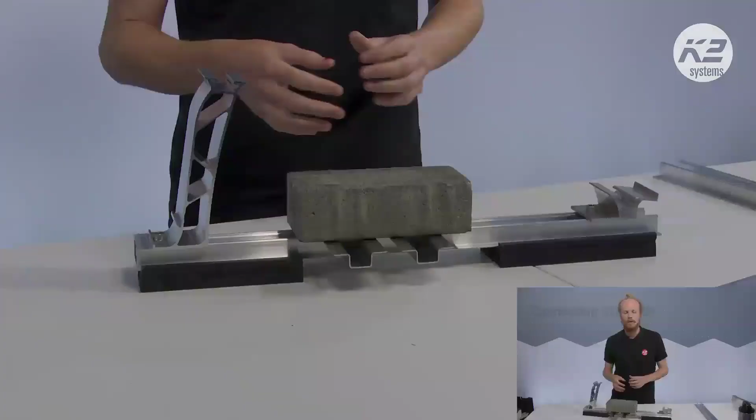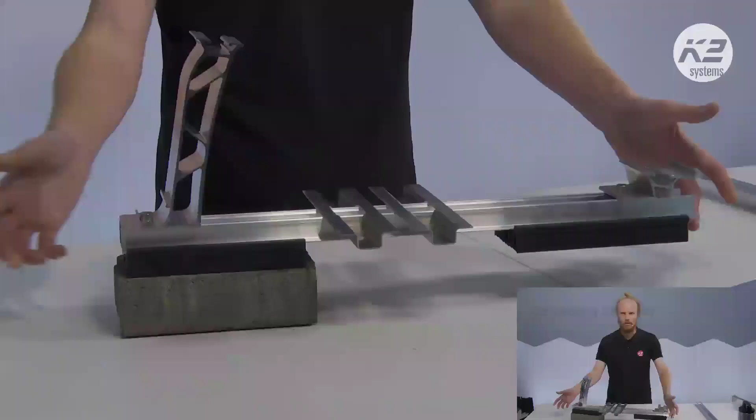So when you have gravel roofs or green roofs, you already have this excess weight on top of the building. It's not necessary that we then put on extra ballast if we can somehow use that additional weight. And so one of the systems we have uses the weight, and the other one is a little bit different where, instead of putting the ballast on top, we put the ballast sort of underneath and screw the rail on top of that. So this is our express system, so it's not the best example, but just to give you an idea.

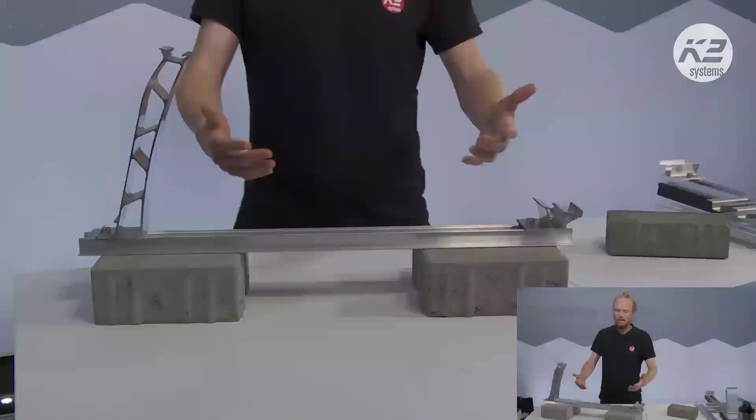And probably to show that one, we'll just jump off with one of the products that we have. And I just miscalculated how heavy that one was. Here is one of the examples that I was mentioning before, where instead of putting the ballast on top, we put the ballast underneath, right? And so there are some advantages to this also from a cost perspective. So to buy a stone, if you're buying them in bulk, it's actually going to be a little bit cheaper than buying the mats that we have.

So you might actually be able to have a more cost-effective system, considering that when you do a system like this and you put the ballast underneath, it's just replacing the ballast on top. So you would usually have to put it on top anyway and buy it with the mat underneath. But in some cases, you can just put it underneath the rail instead.

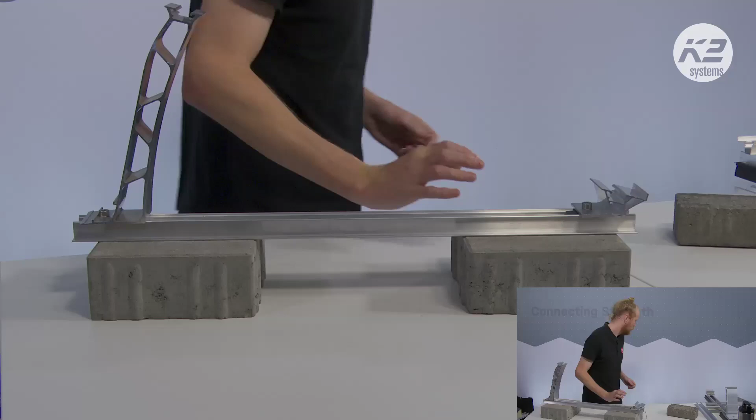So how does this differ from our usual system? As I said before, there's no mat, so that's going to be something that's a little bit different. And we're going to screw it into the rail. Let me just tip that, and you can see on both sides, so over here or even over here, there's a little screw screwing the concrete to the rail, or vice versa, actually, the rail to the concrete.

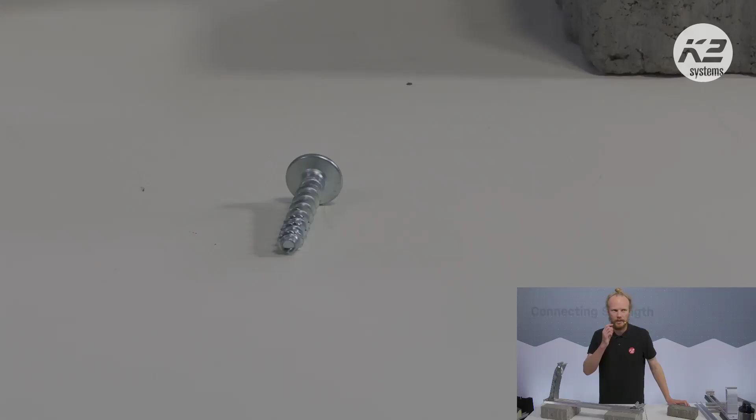And those screws, sorry, I thought I had one just here, are multi screws. These come from one of our suppliers. It's a concrete specific screw, designed for screwing into concrete. We also use a very similar one for our ground mounted systems. So they're designed for really high load situations and are very, very sturdy. You can buy a box of these or however many base says is required, and you screw them into the rail wherever the base report gives it to you.

And so that's something that, as I said before, Vladimir will be going through today. All of what we're showing today will be in base, and you can do it in base, which makes it really easy to know how much ballast you need and how many components you need as well.

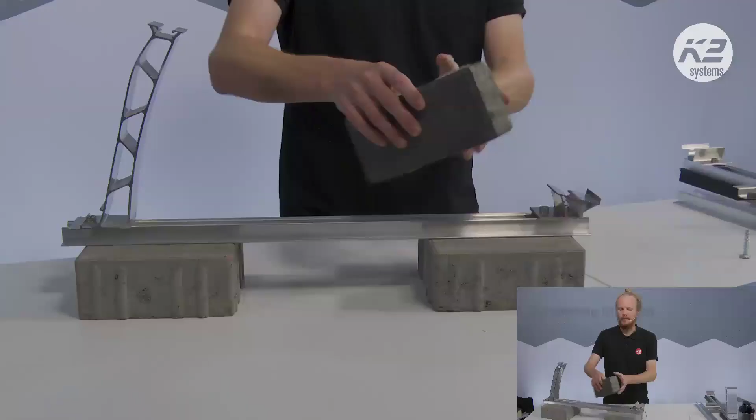So when can you use a situation like this? If you have a concrete roof, you could theoretically just place it straight onto the concrete. You've got concrete blocks on concrete roofs. If you have a membrane roof, you might have an issue with the contact layer and need some form of protection mat or a second layer of the membrane before you put the ballast down on top of that.

But the ideal situation is for green roofs and also gravel roofs, where you can nestle the concrete actually into the ballast. So if you have 5-10 centimeters of ballast, maybe even more, you can spread out the ballast a little bit, put this in, and then bring the ballast back around. And the gravel that's around the stones adds extra stability and support as well.

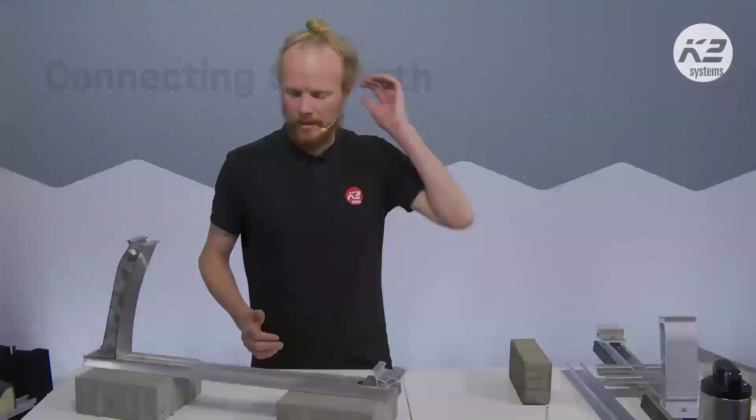So you end up with a system that's very secure, and you're not going to need more ballast. In some cases, you might actually need less ballast to secure your system onto the roof, right? So this is also possible with the green roofs as well.

One of the points about the green roof is that if you are going to put PV on top of the green roof, you are taking the sunlight away from that plant life underneath. So it's not always going to be a one-for-one exchange, but if you are putting the dome system on the roof, there is a big chance that the plant life underneath the material will no longer be growing, right? Just kind of one or the other.

If that's something that is of concern, we do have another system, which is the green roof vento, which lifts everything up a little bit higher. There's a bit more space for light to come in, and it's a bit more plant friendly, we should say. But it's not what we're covering today. We've got a webinar on that, which I think is on YouTube anyway, so you can check that out if you're interested.

So just before we move on to the next system that we have, one of the key points, or maybe disadvantages of it, you're probably going to need more ballast blocks than might be necessary for your system. If you know a base project, you'll usually see a ring around the edge where you need higher ballast, and in the middle of your field or roof, you'll need less ballast.

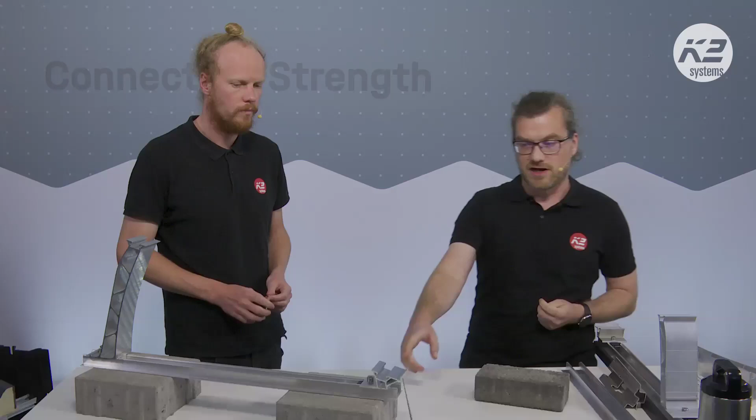I would say from our side, there are no requirements about this concrete. It's only the weight, so you have to calculate it in base and put the correct weight, and the maximum height of the stone is 25 centimeters.

And not higher, because our system was tested until this height and no more. Yeah, and so that is something that you'll see in base as well. If you put this in you'll be asked for the height, because if you do raise up off the roof, there is going to be more space for wind, and the wind analysis - the analysis is still valid, but the output will be different.

But just one point on that - you are going to have to screw with these screws that we have here, and if your concrete block is too thin, you have to screw into the concrete. And if it's a grade of concrete that is not going to withstand being screwed through and will crack, if it's totally penetrated, then that's something that's not going to be suitable anymore.

So as long as the screw is in the concrete and the concrete block is still whole, that's still valid. But we don't have a technical requirement in the sense of larger concrete foundations that you might have to vibrate, or you might need so much rebar involved, or you might need a certain grade of concrete like C20 or C24.

For this, it's more expected that it'll be like a paver stone, or something that you could repurpose in sort of a garden for paving if you needed to, but that's sort of up to you.

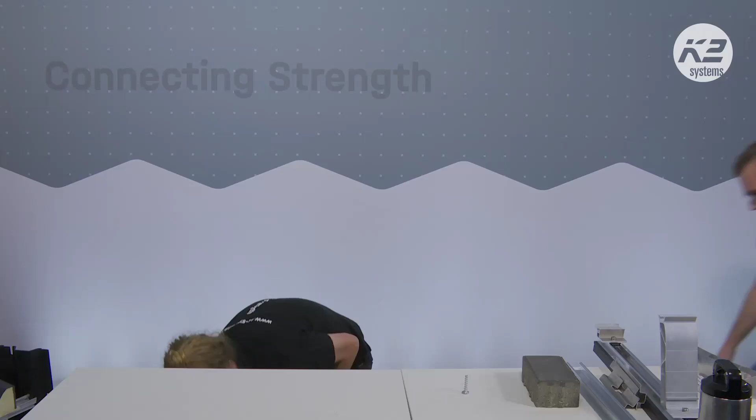So this is one option we have, and the other option is similar but different. We're going to go 2 hands this time after what happened last time, and it's going to use a small PE plate. It looks a little bit like a trapezoidal sheeting. These are just samples - they come in, I think, 600 by 800 blocks, and we've got one.

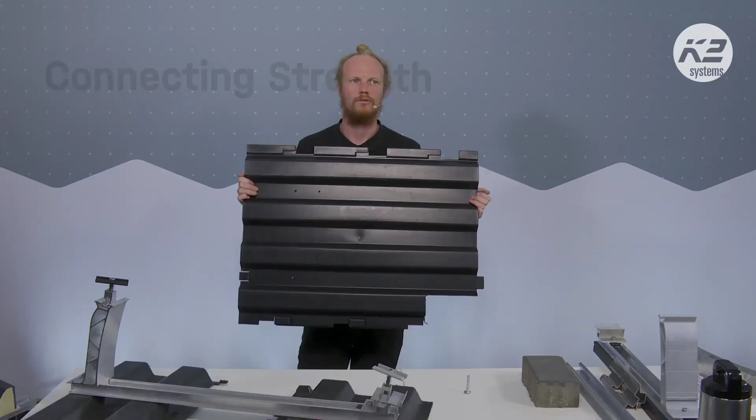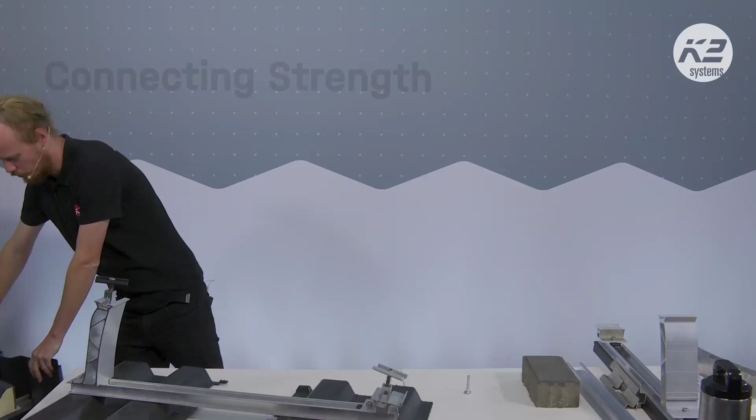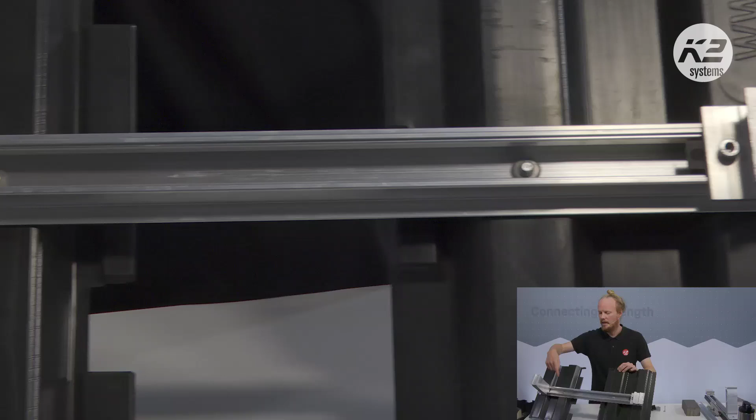No, I actually have one here. Could you change the camera over, please, Klaus, or just do that one? So this one's actually been cut. We have another one that's a little bit to the left, but this is sort of the full size bit, and then they just screw into the rail as before, using different screws. Let me just take these out so they don't fall. Using different screws, but the idea is much the same.

So how this differs from the other system is that this obviously doesn't weigh so much, and so we are going to have this ballast underneath the module, but it's utilizing different points. This is something we do to reduce the amount of excess weight we want to place on the roof by putting PV on the building.

In situations where we have ballast, gravel, or green roof, we have some material that's already on the roof, and this has a density, right? For green roof material, we're looking at about 900 kilograms per cubic meter, and for gravel, over 1,300 - more like 1,800 to 1,900 for that kind of material sitting on the roof.

So if you have 5, 10, or 20 centimeters of material on top of this, we can recalculate and say, the area of this is 600 by 400, and then the volume working up, multiplied by our density, means that this mat is now the equivalent of 20 kilos, 15 kilos, or maybe 40 kilos, depending on the density and height of the material sitting on top. So for every mat, we get an equivalent ballast value, and that goes back into the software and says, base says this module needs 20 kilos, and I know this mat represents 20 kilos, so we don't need any extra ballast here - the existing roofing material is already weighing that down, and we're done.

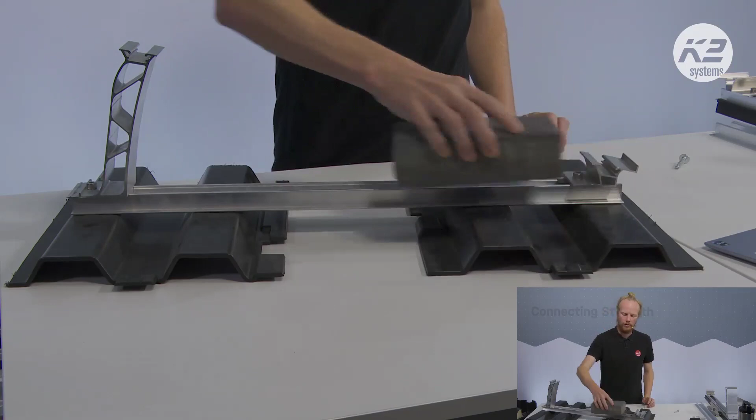There will be some cases where it goes the other way, where the ballast does not reach it. In situations like that, you can also put a bit of extra material either on the PE plates themselves, or on the rails as we had done previously, or if you have the speed porters, you can put them on top of that.

You can also use additional PE plates, or as Vladimir suggested, put more PE plates on the roof. As we said before, if this represents 20 kilos and this represents 20 kilos, and we have enough space - here it's just a small sample, but if we have space for another PE plate in the middle, then this whole section is represented by 60 kilos of ballast, and in most cases that's going to be plenty.

With this one, you can imagine it covers quite an area, so if you're doing it as a retrofit, it can be quite difficult. We'd recommend doing this one more, and with the green roof in general, as a pre-build or part of the roofing and building process. Have the idea that you want to put PV on it, and then you can utilize that style, because it makes it a lot easier than trying to remove all the material on the roof and get it back on. That can be quite a difficult process.

So all of what we've spoken about today is shown in the east-west system, the D-dome and the S-dome. For the S-dome, there is also the possibility of putting in 15 degrees. All of the requirements and input values for the system, and the output values for the system as a physical point, are shown in the software. So with any of our systems, if you can plan it in base, you can build it. If you can't plan it in base, then either you can't build it, or you can talk to us and we might be able to find a solution for you.

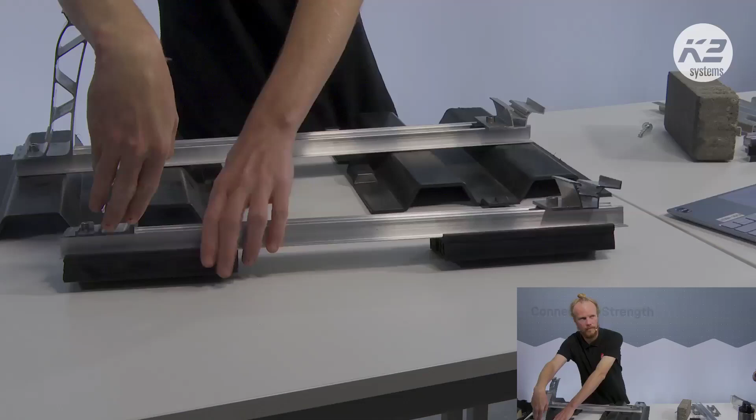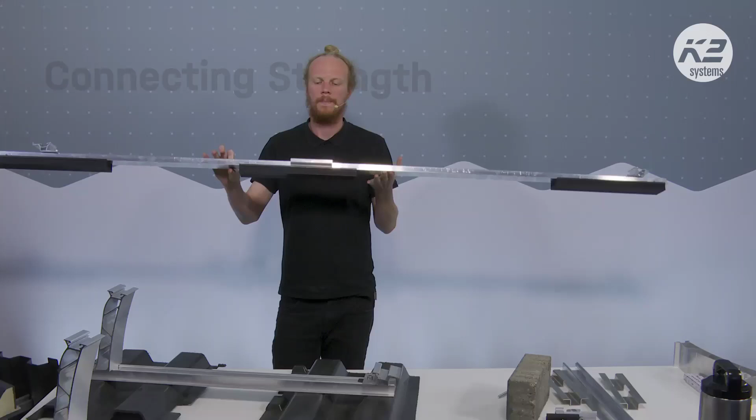That's a really good point. Just to go through that quickly for those who don't know, the express system comes pre-assembled with these mats underneath - we have one over here. This is the product. It comes assembled with the mats on the bottom and the parts pre-assembled. For you to then unassemble it and pull all these apart to re-drill these parts in doesn't make so much sense. So it's only available in the classic system and the classic LS.

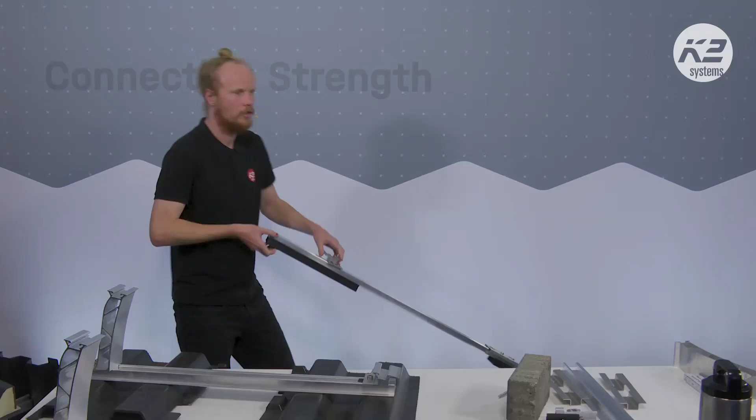But as we said before, once you're in base and it's not working with the express system at the end, that's why. Cool, then I might pass over to you, Vladimir, unless there's another question that popped up, which there hasn't.

So let me start with our usual web page. The first thing you will need to know, or you're usually trying to find, is our assembly instructions and data sheet. The way is as usual - the first step is to switch to our product catalog. And here you have our Dome 6 systems.

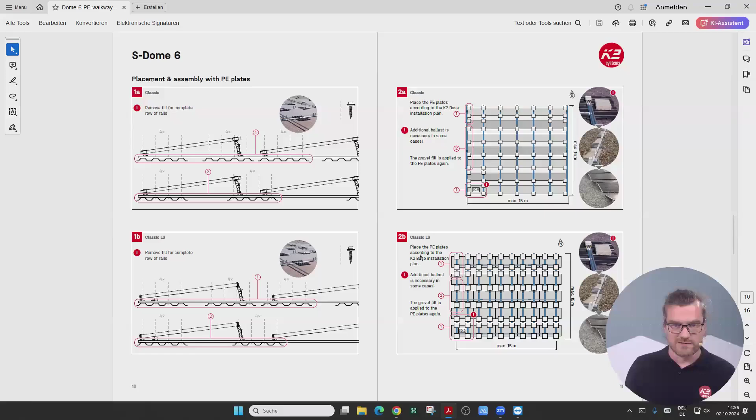And as usual, if you select the downloads area, you have here assembly instructions, and you just have to find the correct one. And this is somewhere here. These are our assembly instructions for domes on PE plates and stones. So you can see here everything, how to install it as usual. The data sheet is also in this area.

Here, for example, for D-Dome, the 6.10, you have here D-Dome 6.10 Classic on PE plates and on concrete blocks, and also Classic LS on PE plates and Classic LS on concrete blocks. Maybe let us see regarding these PE plates, if we have it here, the recycled one. PE plates. Let us check. Yeah, exactly. This one, I believe, is the recycled one. Yeah, recycling certificate.

And we will check if you can select it already in Base, because I'm not sure if it's already implemented in Base. But you have this option. If it's not implemented in Base, you can just, as usual, change the bill of materials, putting manually this article number instead of this one or this one. So let us switch to Base. I have prepared already a roof here.

What I wanted to emphasize with this type of roof, it's a very important part that you have to design flat roofs as an entire roof. For example, if you draw this roof below, you have to draw it as a complete roof and mark this part as an obstacle. And this part, because it's higher than the rest of the roof, you can draw it as a single roof, and this part as well. So you can also draw it as a single part.

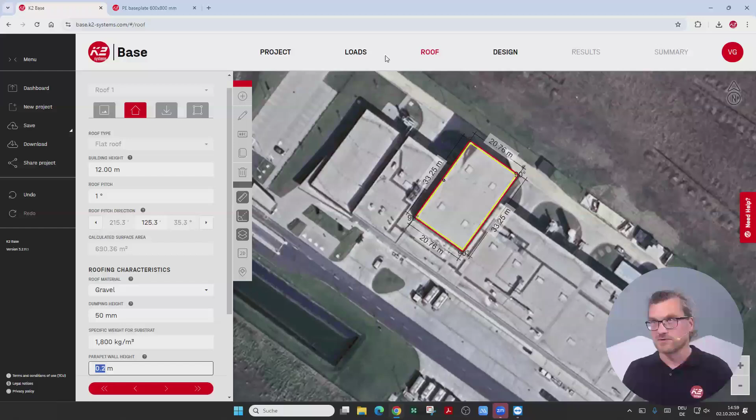If you have on your roof another dumping height, or if you're not sure about the weight of the substrate, please contact your supplier, ask them what the weight is, to put the correct number here, because it's very important, because this is your ballast value at the end. Exactly. So this is our roof. I will not go back to the loads and explain it again, because it's our subsequent seminar and everything was already explained to you last week.

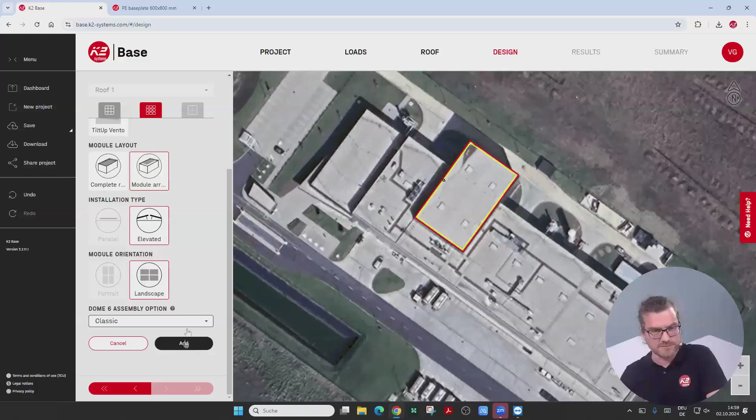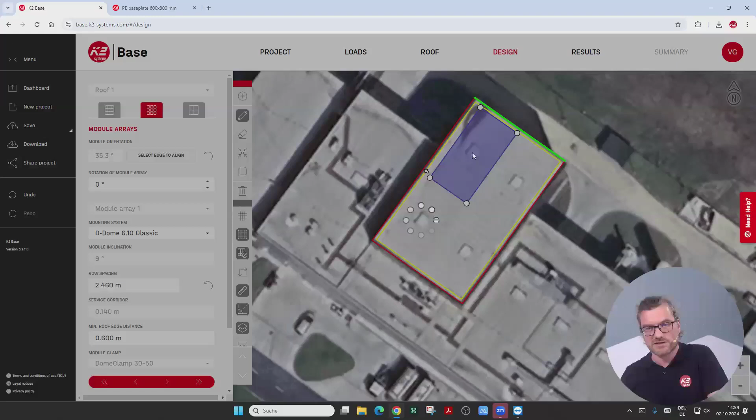So let us select D-Dome, and here are our options. As we said, you can plan Express on stones. You can select Classic or Classic LS. Let us select Classic. Let us draw it like a module field. But we can see here that we have some obstacles. Let us draw the obstacles as well. It's one rectangle obstacle.

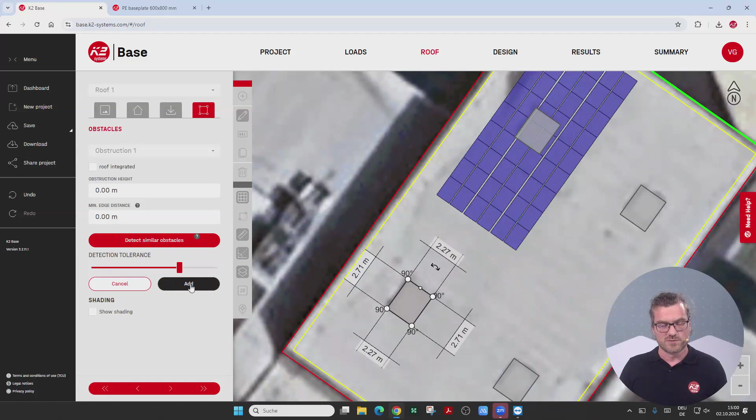And as you know, we have here such a nice option in Base, automatic detection of the obstacles. Just select it and you will see Base is selecting obstacles for you, 3D obstacles. So you just have to click on it, and you have the obstacles here. So this is our module field. Let's make it a bit bigger maybe, with an obstacle in the middle. So we proceed to results.

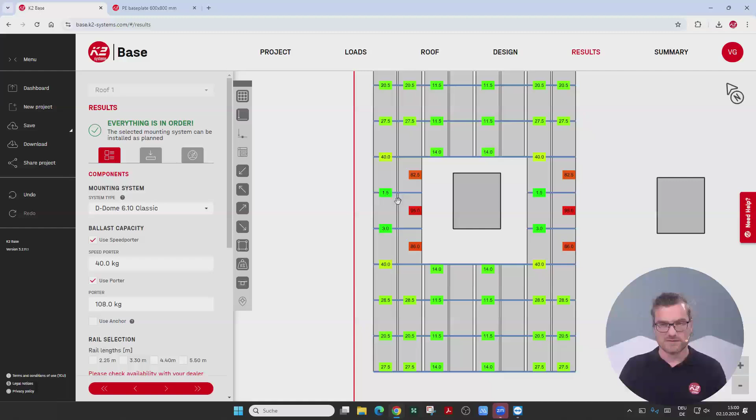And here is our usual ballast, like you know, here on SpeedPorters. Here in the middle means that it's on Porter Long. And here, as always, is our question mark explaining what options you can select. You can also click here to receive more information, for example about base plates, or to see the video.

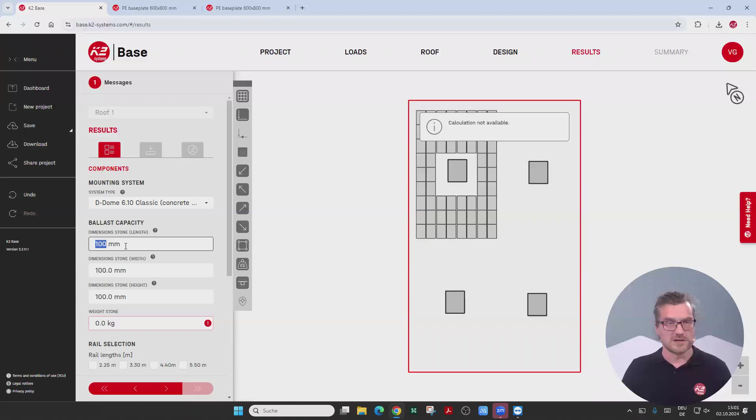And here you can select, for example, D-Dome on concrete blocks. So it's our D-Dome on stones. What is necessary here is to put the dimensions of your stones. As usual, here is a question mark explaining what we have to put here. Let's make the stones a bit bigger. And most important is to put the weight of your stone here. Let us make it with 15 kilos.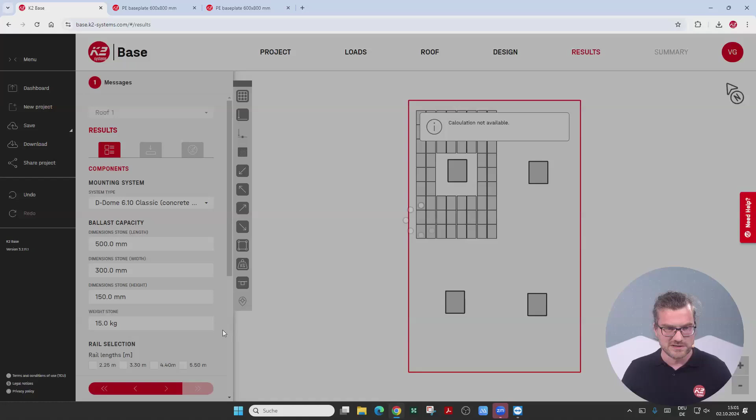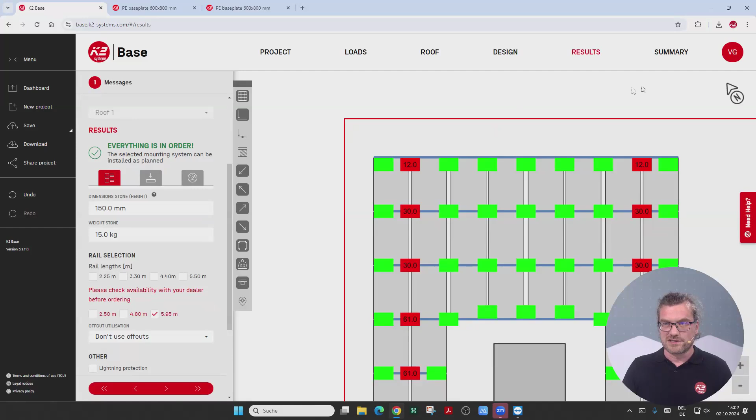And you can see here that underneath each peak and each SD, you have a stone, because the rail must be on the same height. And where you see these red values, that means that one stone is not enough. So you have the choice to put a SpeedPort in this case and put an additional 15 kilo stone on it, or Base calculates these additional stones automatically, because you will see here that you have more screws than green stones. That means Base automatically calculates for you these additional stones to be put under the rail and screwed into it.

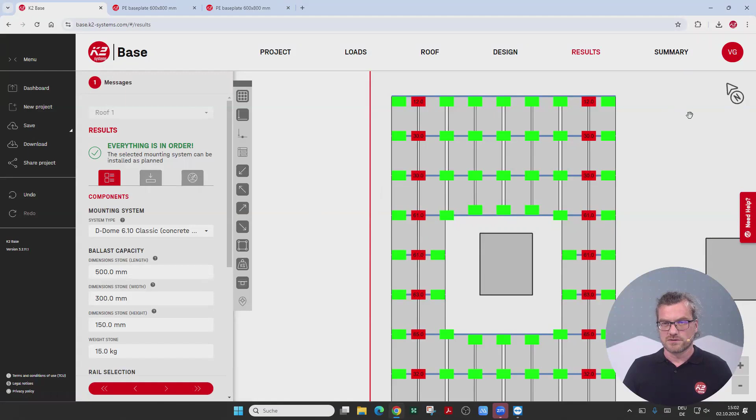What else is important here? I believe that's all. So exactly, maybe. So let us do the same with green roof. So for green roof, our experience values for the height of the substrate. Let's change it.

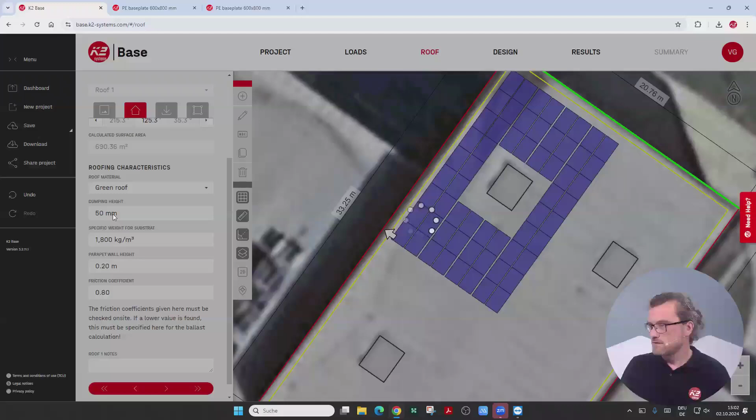Vladimir, this might be a good point to talk about the green substrate a little bit more, because you'll usually get 2 or maybe even 3 values for the green roof substrate. So you'll have like a dry density and a wet density. For this green roof, when you're going to use the PE plates that we have here, the density of the material is paramount for the ballasting. Like, it is the ballast. So if you're unsure and they give the 2 values, always use the lower value. It's the more conservative value.

And if you have a situation where it's dry for an extended period of time and the roof begins to dry out, you want to ensure that the ballast in the system is using the least value, or the least amount of ballast per centimeter up that's necessary. So this density, if there's a dry one and a wet one, use the dry one. Like usual, just to be on the safe side. I just forgot to show something else.

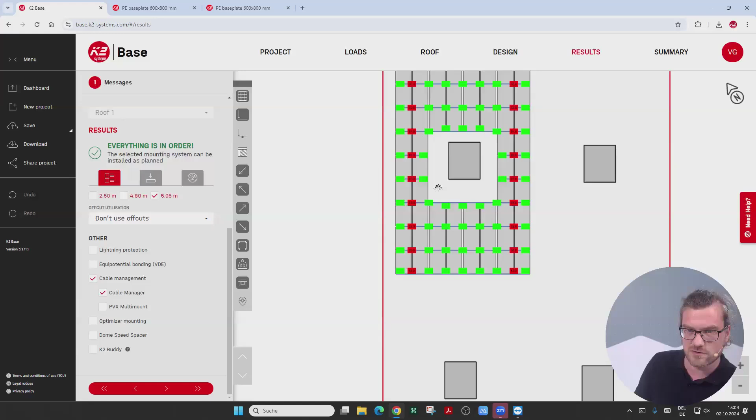Now, gravel roof on stones. Another important part here, let's show ballast in kilograms, but you can also show it in stones. Yes. Or not? No. Okay. Then only in kilograms. Okay. Let us switch to the green roof.

So the usual value is like 120 millimeters. It's like the usual normal one, 140 millimeters, maybe 100 millimeters. And the weight of the substrate is much less than for the gravel. So our experience value is 900 kilos per cubic meter. And let us change it here. So let us select the PE plates.

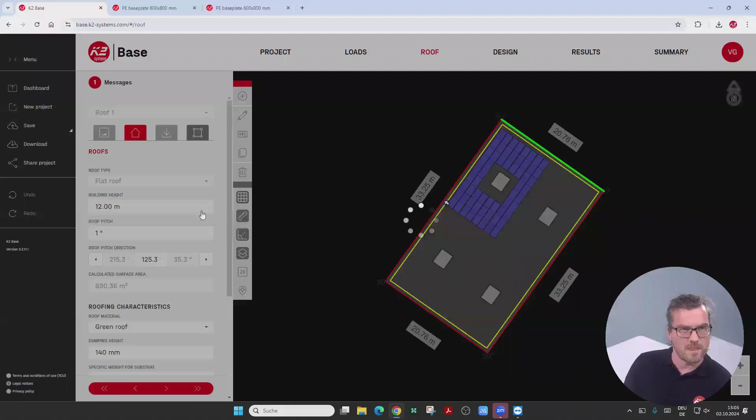Interesting. Yeah. I don't think so. 120 is usually enough. Then go back to gravel. Yeah, it's funny. It's not showing. Let's check it again. Okay, so let me maybe present it with gravel roof as well. And maybe then we will be able to switch to green roof.

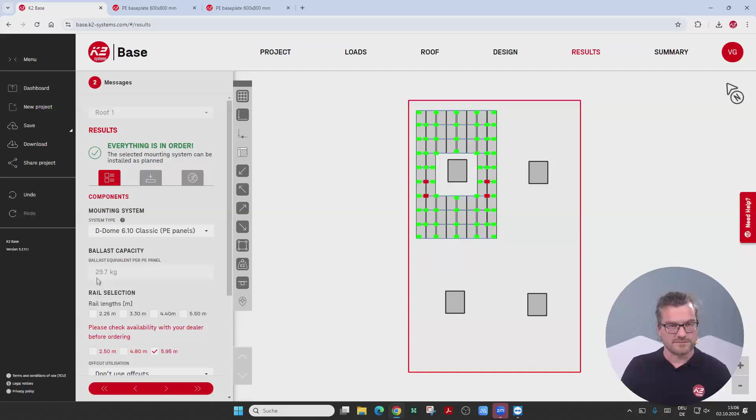Yeah, exactly. This is our PE plates. So you will see that you don't need so many PE plates in this case, so it's even less than our stones. And here you can see this very important value is the equivalent per panel. So basically it calculates if you use this weight of substrate on each PE plate at this height, you will get almost 30 kilos of weight on each PE plate. This replaces the ballast.

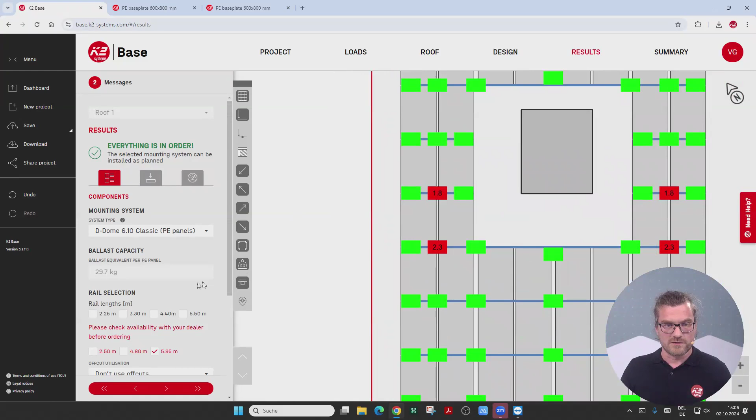And here you see these red spots. That means that here one PE plate is not enough. You have to put additionally 1.8 kilo, or as we said previously, you can use an additional PE plate here and don't put any additional weight on it. Also, in this bill of material, it calculates automatically the additional PE plates you would need. You will see here all the green and additional 4 PE plates for the red spots.

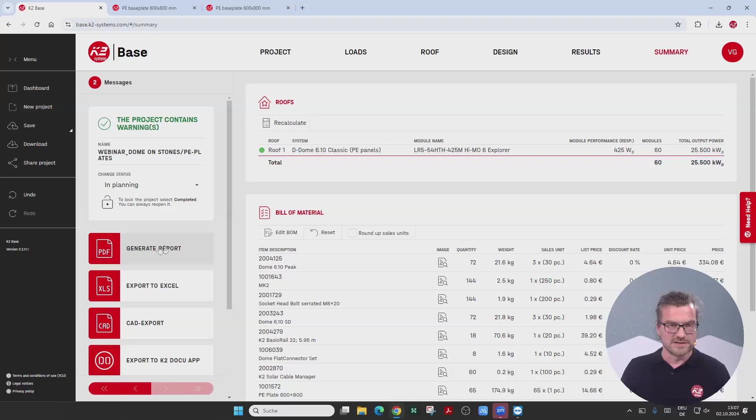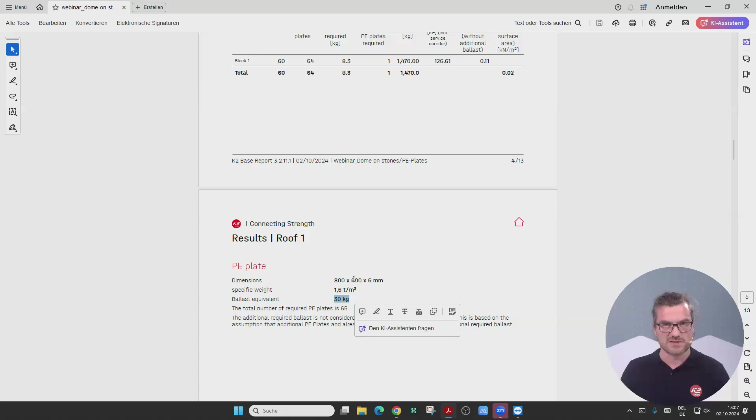And in our report, you will also be able to see it. Let's open it. So I didn't create the full report, but a part of it. And here you will see the number of additional PE plates required. And here's the value, so the considered weight of each PE plate. So it means the value which is put on the PE plate. So the same we can do with other systems.

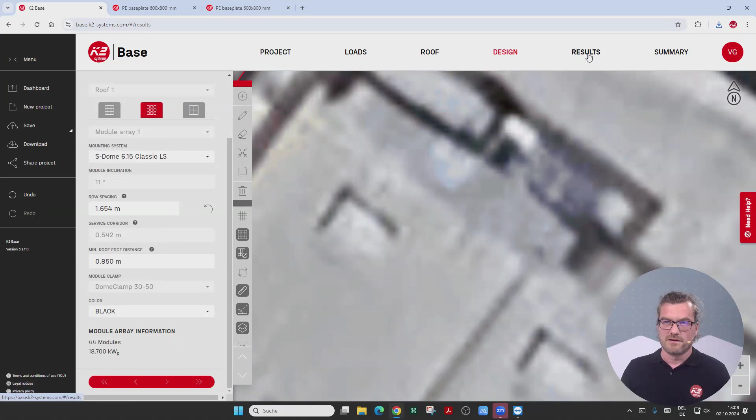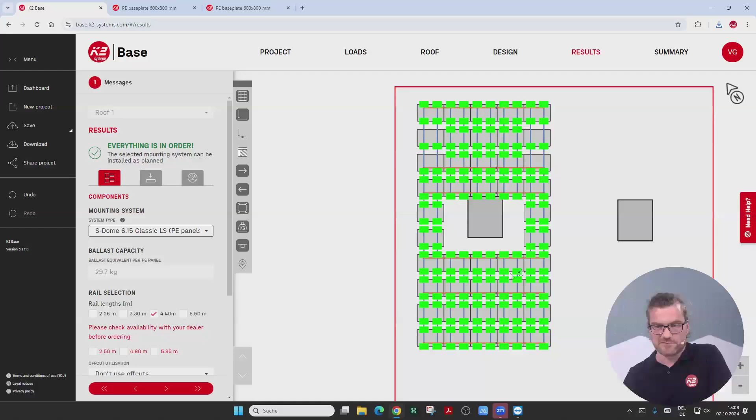Let us check with S-Dome 6.15 Classic LS. That is our results. Let us put it on PE plates, for example. You see that you don't need any additional PE plates, so it's enough to put here one PE plate under each peak and under each SD.

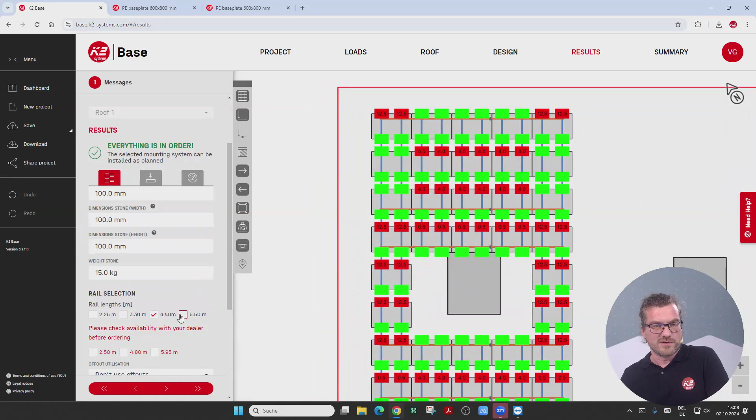And if you put it on stones again, let's just put the weight of the stones. It's showing some errors. Let's try to refresh the page. Exactly. So you will see that you will need some additional weight, but it's also not so much, and you can just use an additional stone everywhere to compensate this amount you have to put additionally. So maybe those are our most important parts. Let's try again with green roof, because I really don't know why it doesn't want to show us.

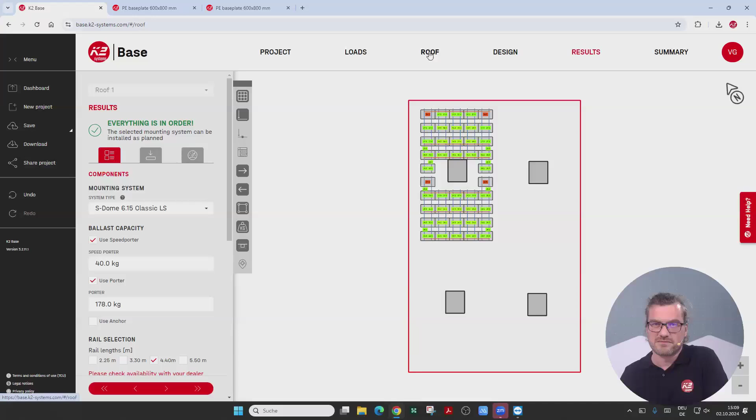Yeah, no idea. So it's not working today. I don't know the reason. We will check it with our base team later. No, I cannot say why it's not working now. Like usually, if you try to show something in a webinar, it's not working. Yeah.

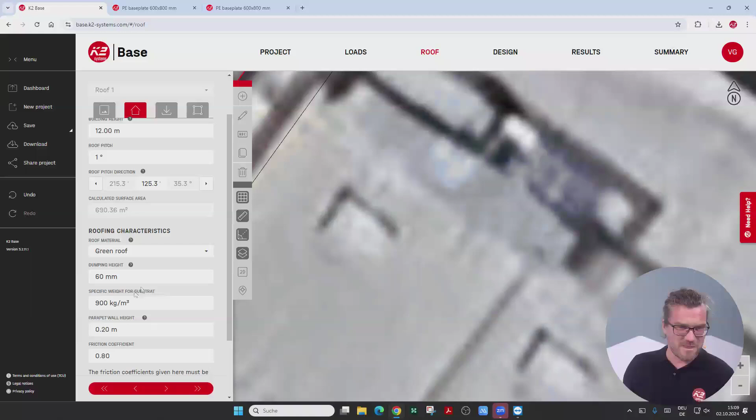Vladimir, maybe we could go through the report in a little bit more detail as well, because there are a few points that are a little bit different in the report that provide, I'd say, a little bit more detail than some of the other reports, and it looks a little bit different as well. So specifically to do with the ballasting values, because when you are going to add the stones specifically, you are still adding quite a bit of extra weight to the roof. And depending on how you deal with that, if it's a roof with a low load reserve, it could be something you really need to look into.

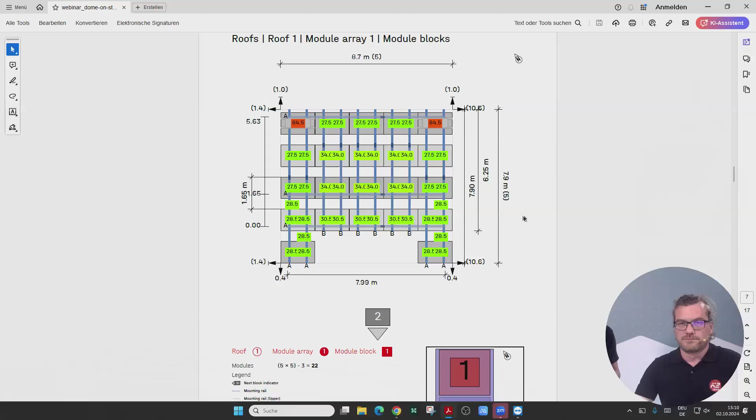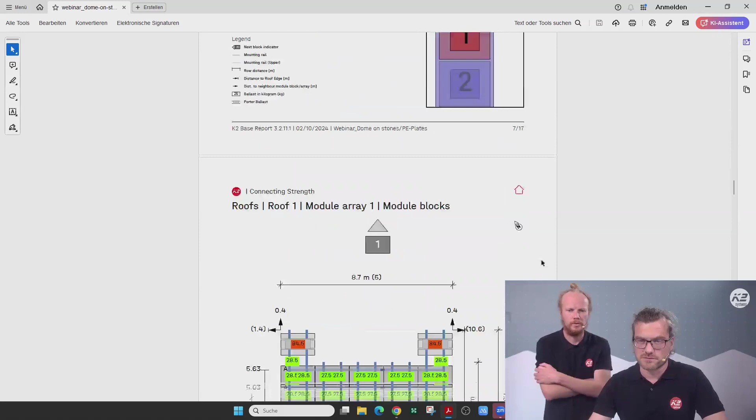Yep. Just a bit further down, oh, this is just standard ballasted though, yeah? Yeah, this is our standard assembly plan where you have to put the weight. Yeah, and maybe we could compare that with that of a... And so this is the table, yeah. So this specific loads table has looked like this for the last number of years, before we've had this other system involved, where we're talking about the dead weight of the roof and the ballast on the roof.

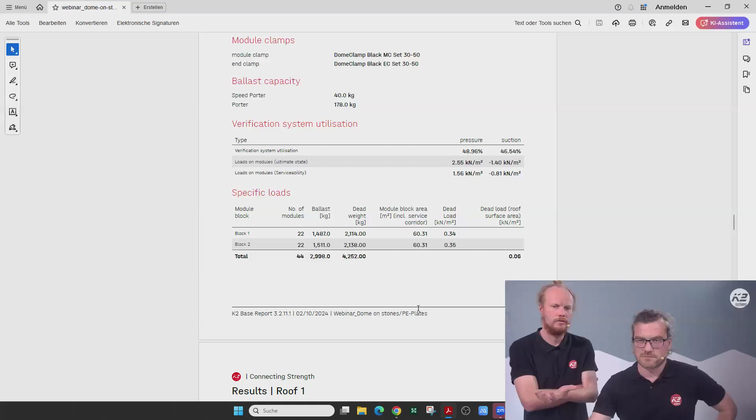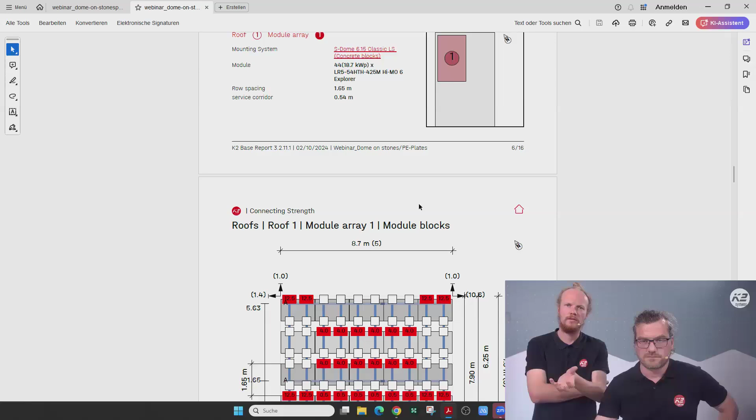But when we're going to add more components in terms of the stones, it's going to look a little bit different. So maybe we could rerun this one with a stoned concrete block option, and then we're going to see it look a little bit different. There's going to be some more details in there. And yeah, on that specific loads part as well. Because sometimes these are the sort of roofs where we're looking to reduce the amount of ballast, a bit of understanding of this table is really important.

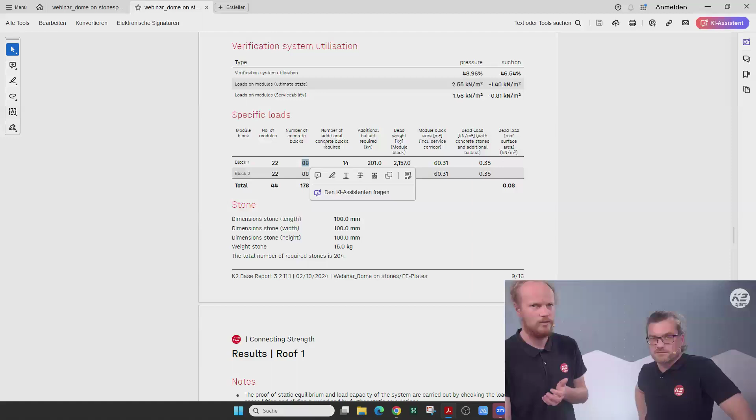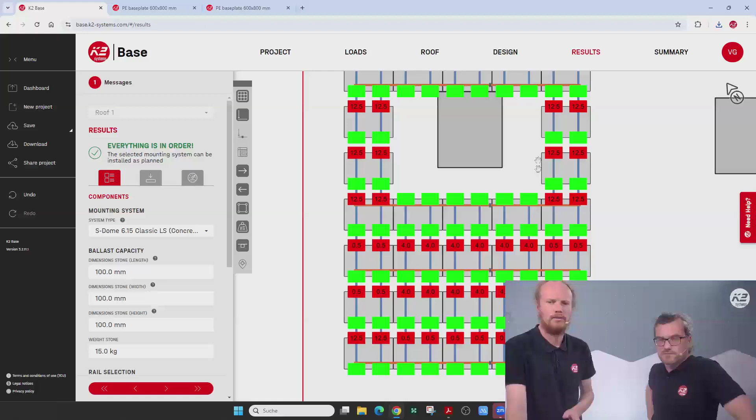I think here we see we've got 3 or 4 more different points. And then if we think back to base, this is the number of green blocks, or the green squares, that we saw. And then this is going to be the number of additional ones as well. So if you were to add 1 stone for every amount of extra ballast, let me just jump back. So for every bit of extra ballast, you would need, oh, sorry, what am I doing? Lost my cursor as well. You'd need the values here. So be careful what you're going to look at in terms of whether you're going to add the extra blocks or the extra kilos.

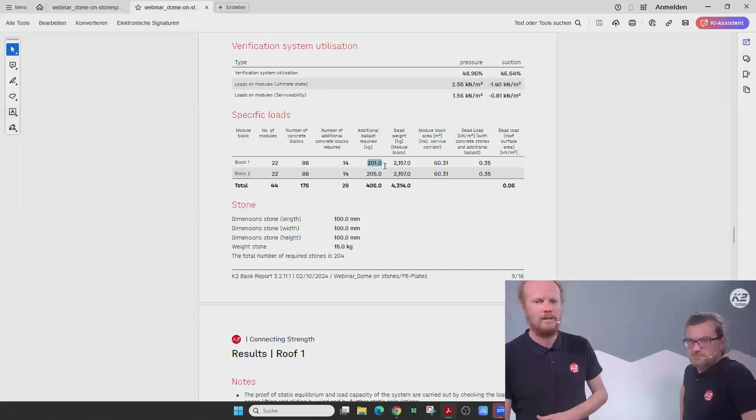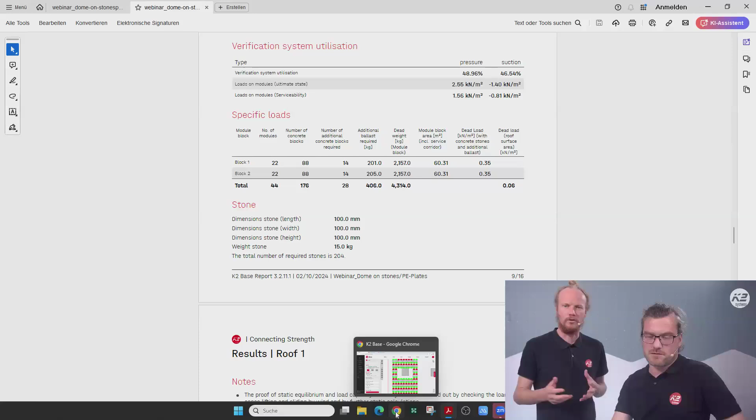So maybe you've bought 15 kilo stones as we've shown here. And then maybe we're going to buy a 5 kilo stone as an extra stone, or maybe we're going to use a 15 kilo stone. Depending on how you achieve this extra ballast, it might have a bit of an impact on these values. So this table is pretty detailed. If you are just joining for the first time, getting your head around what these colors and some of the values in this table mean might be a bit much. But as we said at the beginning, we have some expectation of prior knowledge for these webinars.

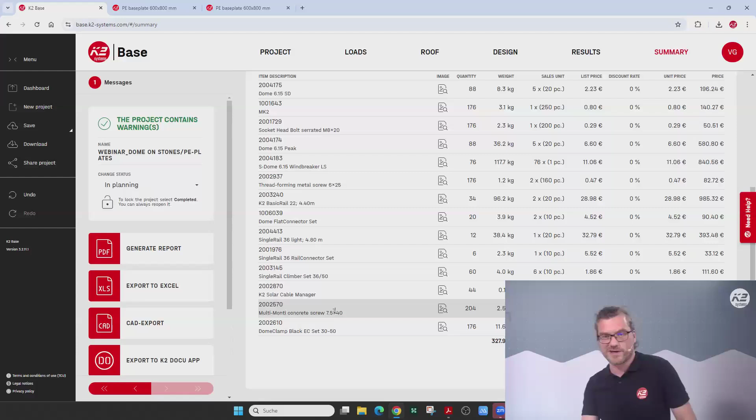Maybe one additional point to add: here in this bill of material, you have only these Multi-Monti screws. So base doesn't expect you to combine SpeedPorters and stones. If you want to use SpeedPorters for additional ballast, you will need to add them to this bill of material manually. You know that you will need 2 SpeedPorters for each stone, so just put it here manually.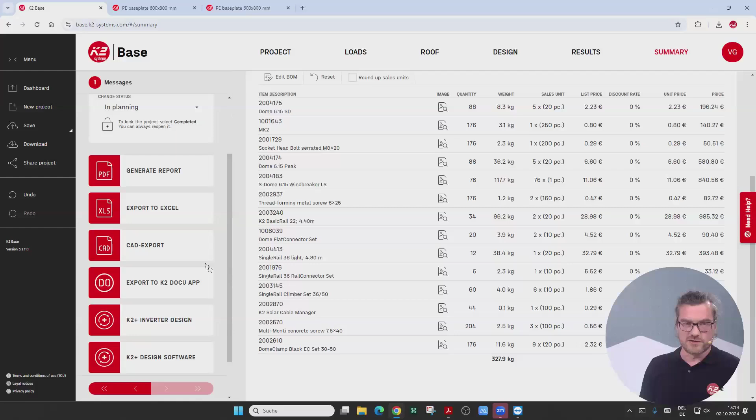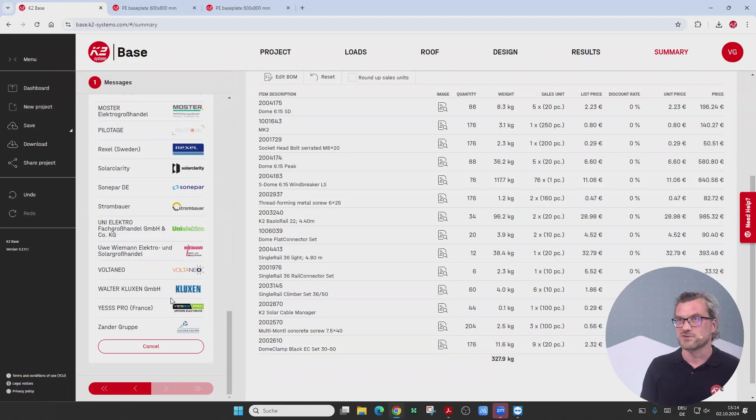Yeah, and as usual, you can create the bill of material here, and one new option we are really proud of is that you can transfer this bill of material directly to the web shop if your supplier is already connected with K2 Base. For example, this here is a list of all suppliers which are already connected, and if you are logged in to the web shop of your supplier, you can just click on it, and this bill of material will be transferred automatically to the supplier's web shop.

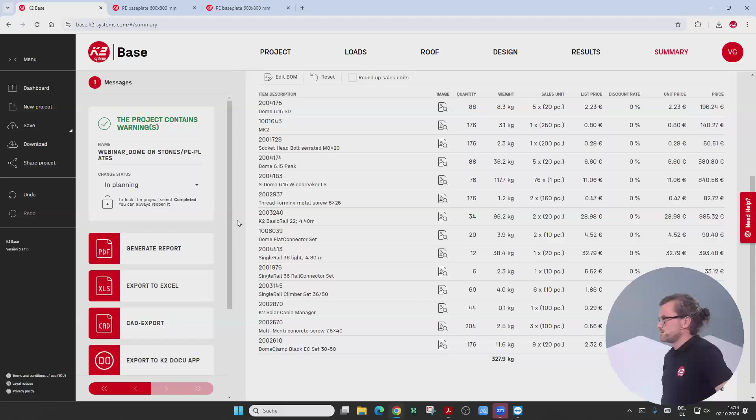Yeah. Do you want to add something else? I think from what we had to show online and what we had to show with the physical products, that was about it for today. So we will then begin to wrap up.